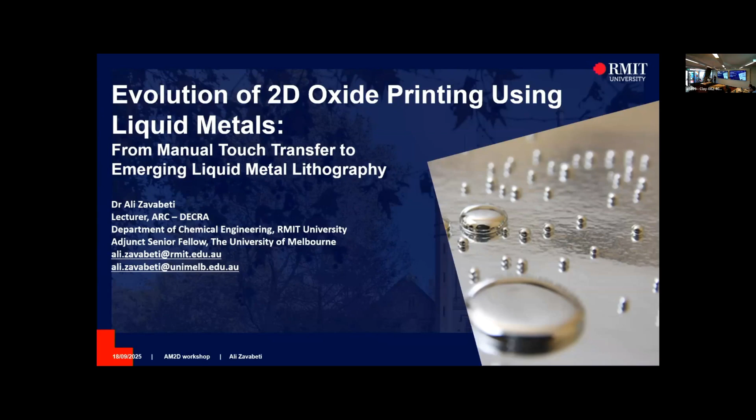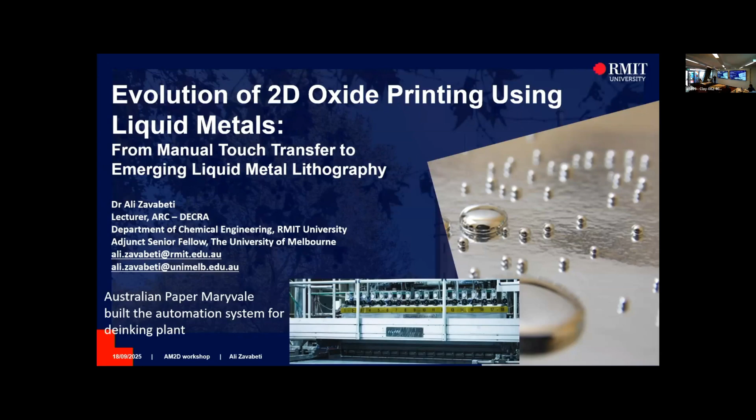Just a disclaimer, this is a recently developed technology, less than 10 years old, so some of it is adopted technology and some of it is ongoing research. As Naima introduced me, my name is Ali Zavabeti. I got my PhD looking at liquid metals and their surfaces, and we successfully exfoliated 2D oxides from liquid metal surfaces. The relevance, as Naima mentioned, is that I also used to spend time at Australian Paper down in Maryvale, building the automation system for a de-inking plant. So that's the relevance from my work to larger scale printing, and I try to bring these two together.

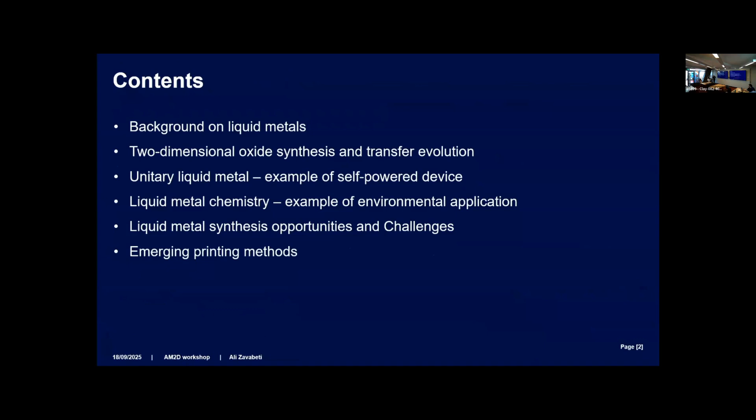So I'll discuss liquid metals briefly. I'm sure many of you know what liquid metals are. I'll talk about unitary metals, just one metal, liquid metal chemistry, which is also very interesting to investigate, some of the opportunities and challenges, and some recent work we did in printing 2D layers.

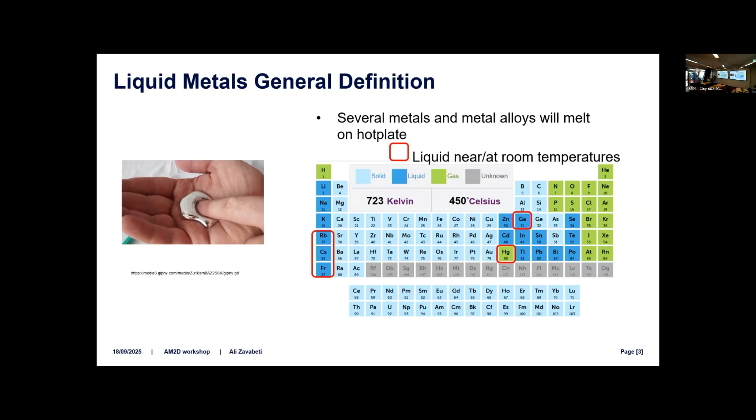Of course there's mercury, but mercury is toxic and also evaporates at higher temperatures. Rubidium, cesium, and francium are pyrophoric or radioactive, so they're not really useful. So we end up using gallium and its alloys, which are non-toxic and melt at around 29.7, 29.8 degrees, so if you hold it in your hand, it melts.

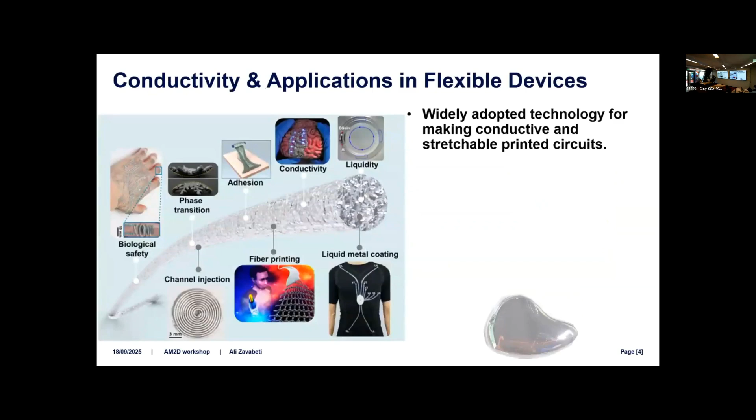Liquid metals are mostly integrated because of their conductivity in flexible device applications, basically stretchable devices. That's the main thing that stands out from other coatings, that it stretches and goes back to normal because it's liquid, it just merges back.

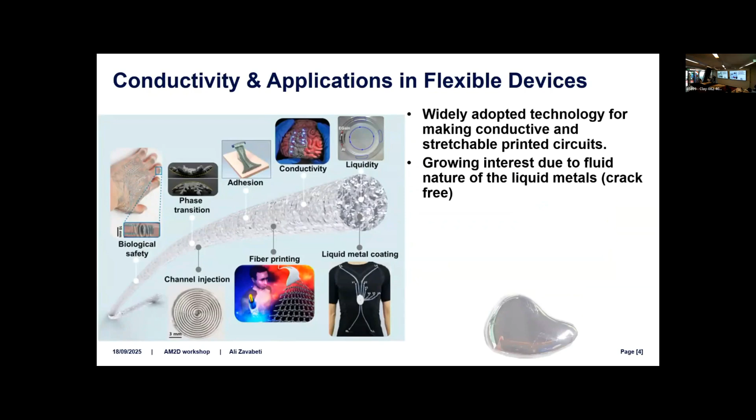So the two most investigated or utilized alloys are called EGaIn and galinstan. EGaIn is gallium indium, with a melting point of about 15.5 degrees, and galinstan has a sub-zero freezing point, so both stay liquid at room temperature. These are highly utilized in these types of applications.

Basically, the bulk liquid metal, generally speaking, is mostly a passive compound. It can be used as an active compound, but mostly it's passive. So, for instance, let me try to play this.

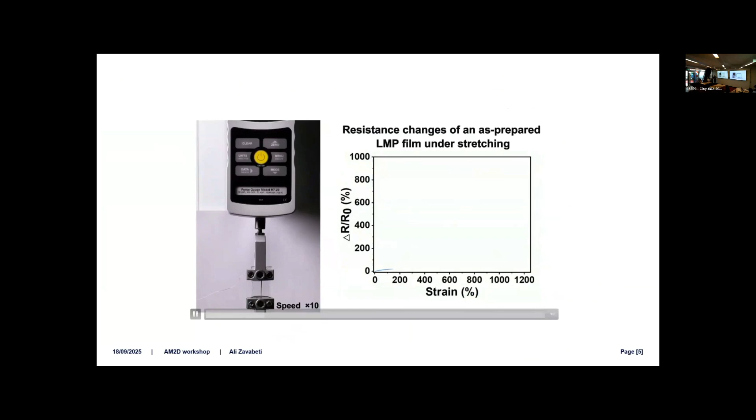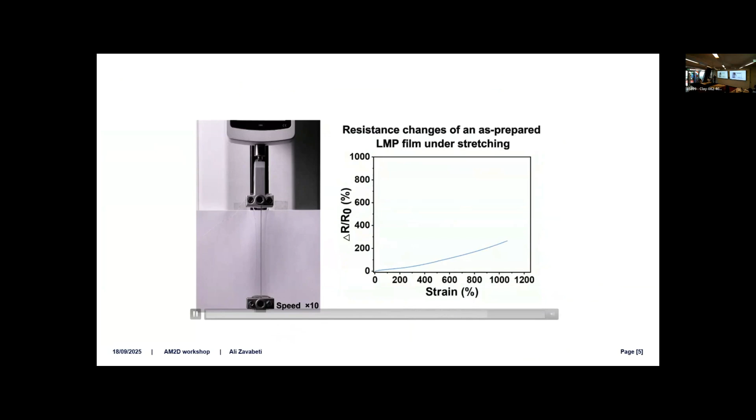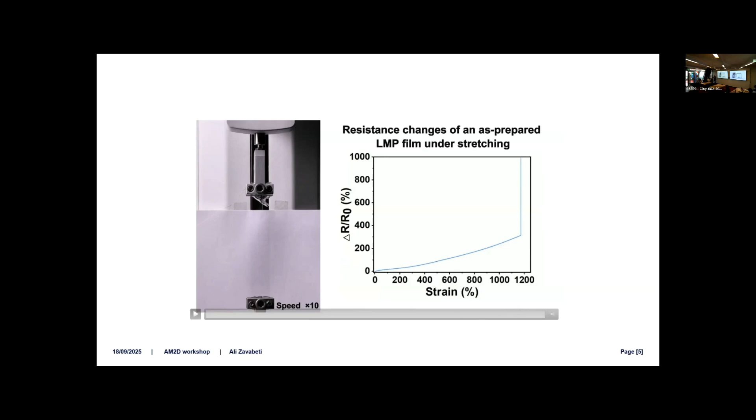It can be implemented in stretchable devices. They can stretch, and the stretchability is basically limited by the PDMS or the holding substrate, so it can literally go up to 1,000% strain. That can be used as a pressure sensor, for example, because as you stretch it, the resistivity increases, so you can measure the pressure and the stretch. Also, because they're biocompatible, they've been used as pressure sensors and as electrodes in bio devices.

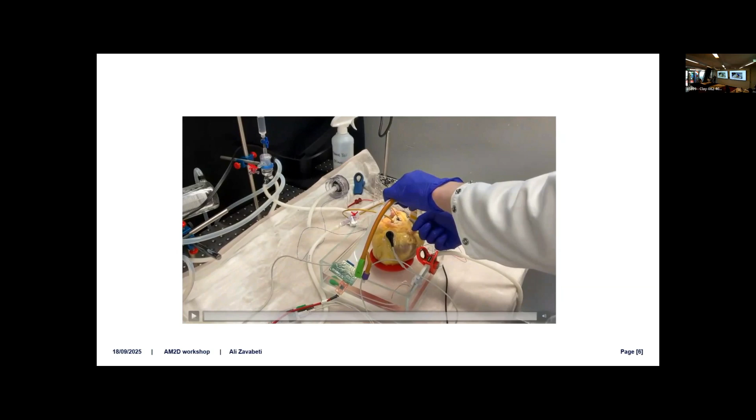So what I'm trying to focus on today is the printed layer of oxides from the surface of liquid metal. That's my main focus, which are the most active compounds we can use, basically functional materials that we can harvest for use in electronics, sensing, and so on.

On liquid metals, similar to all other metals, there's a nano layer of oxide spontaneously formed if it's in air, at room temperature, in ambient conditions. That oxide layer is self-limiting; it grows and creates a barrier, both a physical barrier and a potential across it that limits growth of the oxide layer, so it remains in the nanometer regime.

Again, one fascinating thing about liquid metal is that a liquid surface is the most atomically flat substrate, so it's really ideal for 2D material growth.

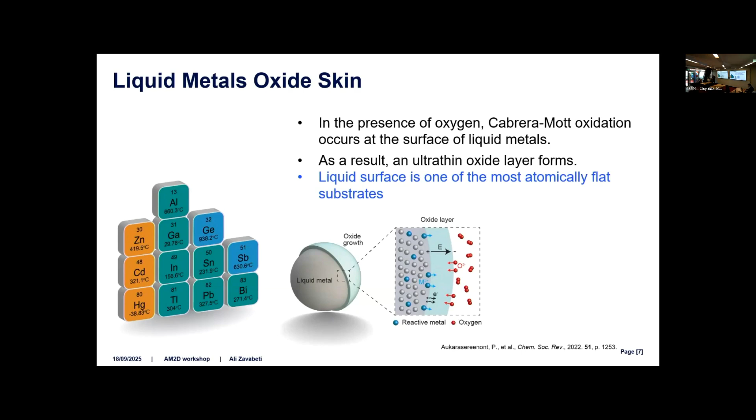So we have invented several methods for printing these 2D oxides. We started in 2017, 2016 by just touch printing, basically melt the liquid metal on a substrate, get a substrate, another substrate, touch the surface and delaminate. So we could harvest 2D layers.

Then we came up with a slightly larger surface area printing. We called it squeeze printing. So we can place a smaller droplet between two substrates, press them. As the droplet expands, it forms oxide, and also at the same time, the oxide attaches to the substrate. So we can coat and print 2D oxides on this substrate.

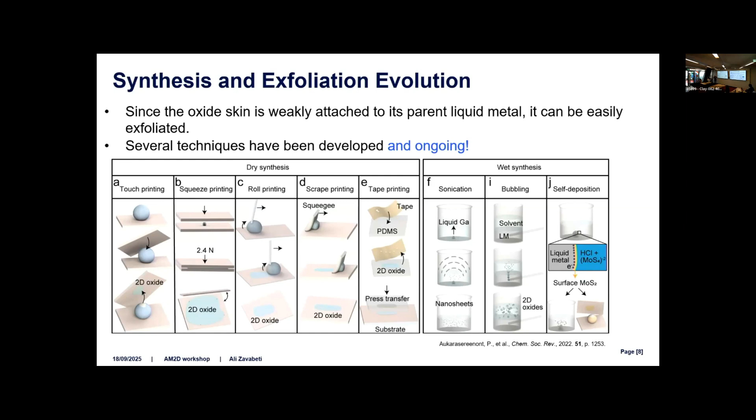And also we invented roll printing. Basically, it's like a pen style. You can roll a droplet and you can basically write in two dimension. Again, we invented several different methods to also have them as a suspension as well. So I'll just play you a video of how we have done this.

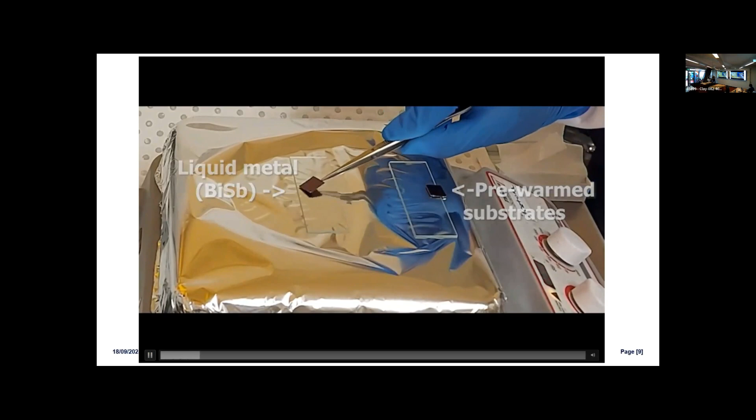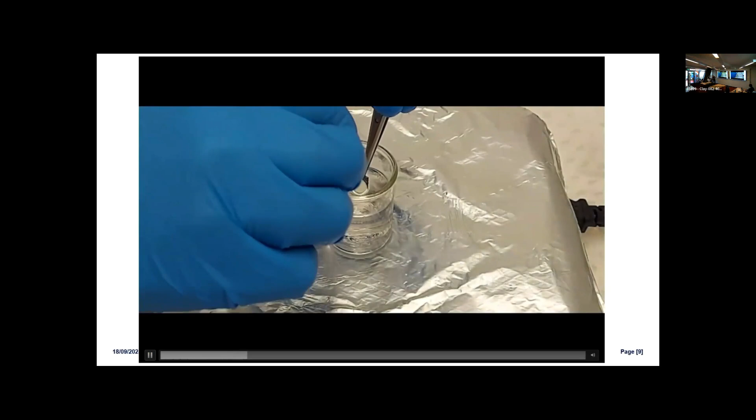Firstly, touch printing. So you can grab a substrate and touch to a liquid metal, and then you've got a 2D material printed, as simple as that. Or you can basically squeeze, and then you get a larger area. But because you delaminate also liquid metal, you can wipe it in warm ethanol, so it can be easily cleaned.

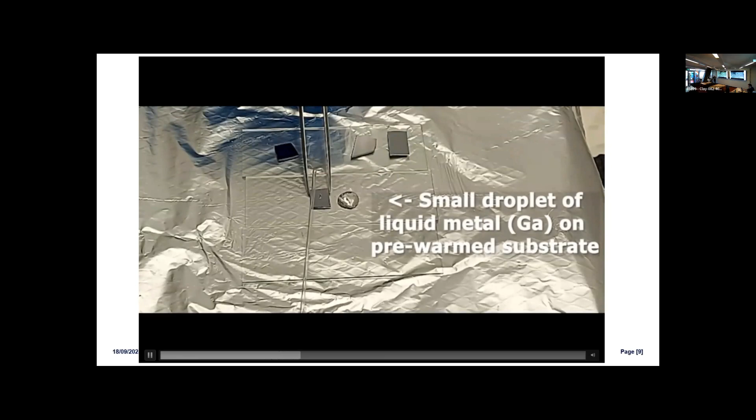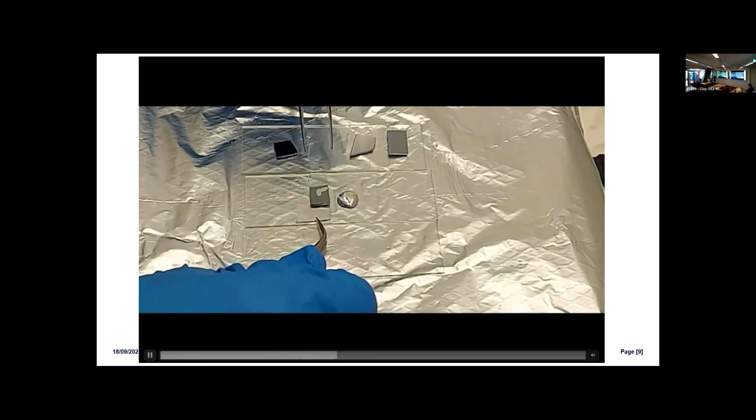The roll printing we invented for this specific mixture because the viscosity for this specifically was very high, and we had to drag it along the substrate.

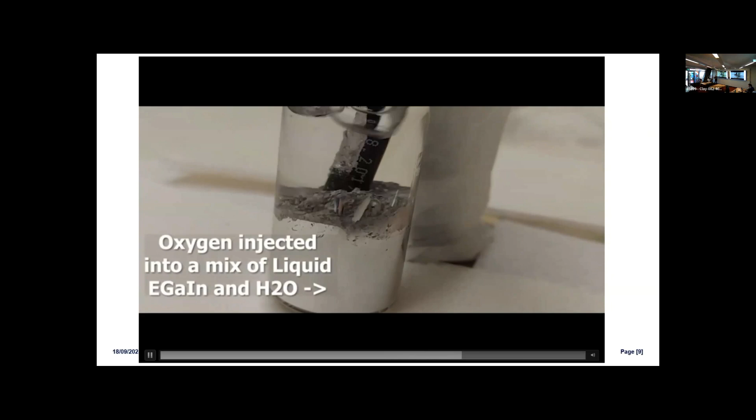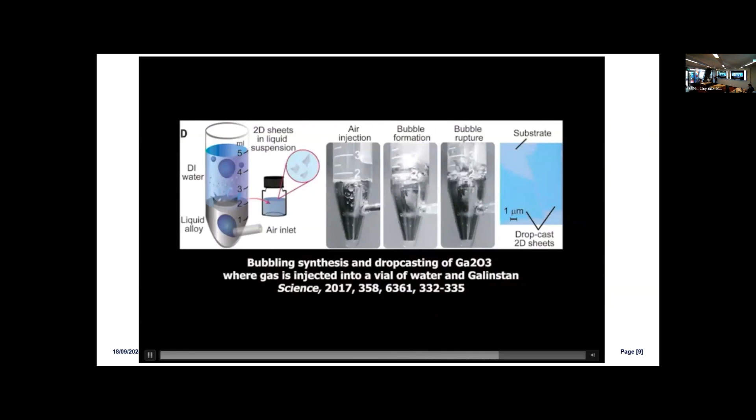And also, to get in a suspension, we can just bubble gas, any reactive gas. Here, just oxygen containing gas, and then you can basically as the bubble rises, it forms a 2D oxides and then releases 2D oxides. Then you can basically drop cast.

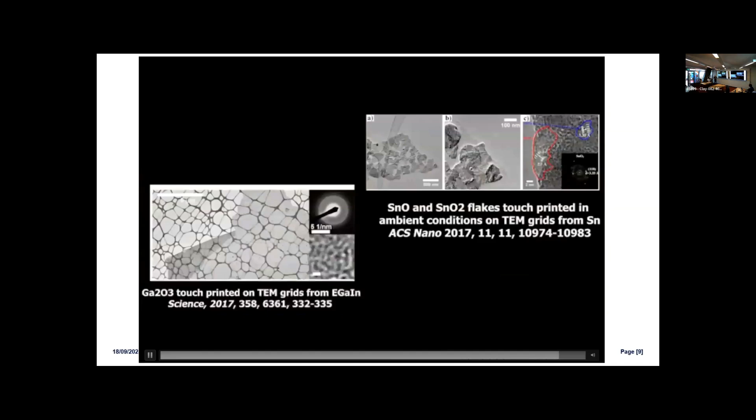So here is the way that we can also clean the surface. If you squeeze, the alloy comes out from the other side. It's fresh. The surface is fresh, so you can again grab another substrate. Here a TEM grid, because we need to also study these 2D layers atomically. Basically, we use TEM to study, so that's the way we transfer onto a substrate.

Oh, I think I jumped out. Okay, so when we

So we can also change the surrounding gas to other gases. For instance, here is H2S. And then we can melt tin and touch a surface. We can get one of the best piezoelectric materials as a coating, which is SnS.

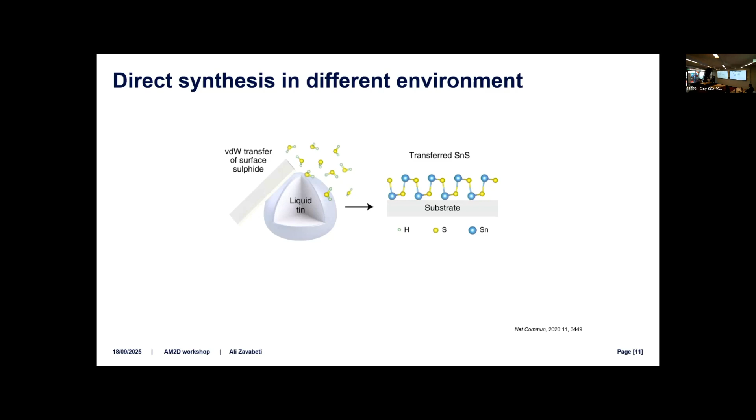All right, so would like to just briefly discuss about single metal against alloys. So what happens if you have alloys and if you have single?

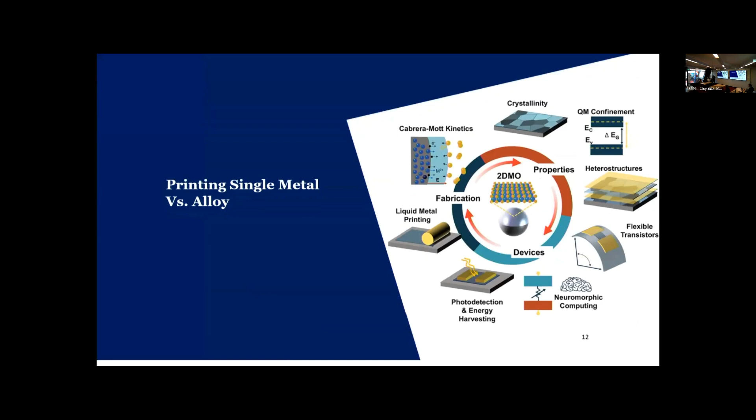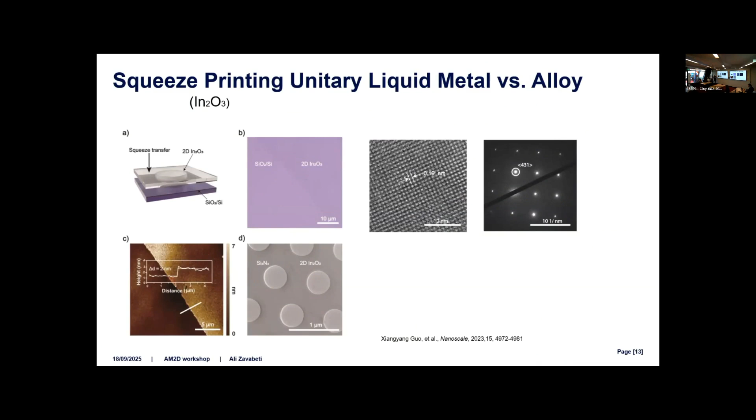So for single metals, for instance, we have indium. We can squeeze print and we get highly crystalline. It's a cubic indium oxide. It's about 2 nanometer. Basically, the indium can melt at just above 150. So we place a hot plate around 200, just above 150, and we can basically 2D print these very nice indium oxide layers.

For ITO, basically ITO is widely used contact material. Basically, it's a TCO, transparent conductive oxide. So we have shown that if you mix indium and tin, and then we squeeze print, we can get ITO as thin as just a few nanometers. So here is 1.5 nanometer. We can multiple print or just a single print, and we can basically, we show it is conductive.

And we use touch screen in our publication, and this is being used with a different style. So in industry, they used to, like in Apple and Samsung, apparently they used to have a glass inverted and float onto liquid indium and then sputter tin on top to make ITO. However, they have changed their process slightly to also just, instead of doing sputtering, just to melt it together with indium. So they adopt, this is an adopted technology at the moment.

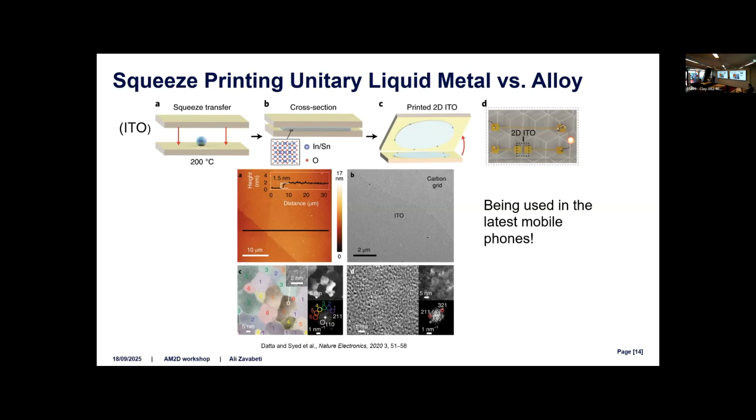So, and then there is also a chemistry involved with liquid metal. It's not just mixing two metals and get a complete mixture.

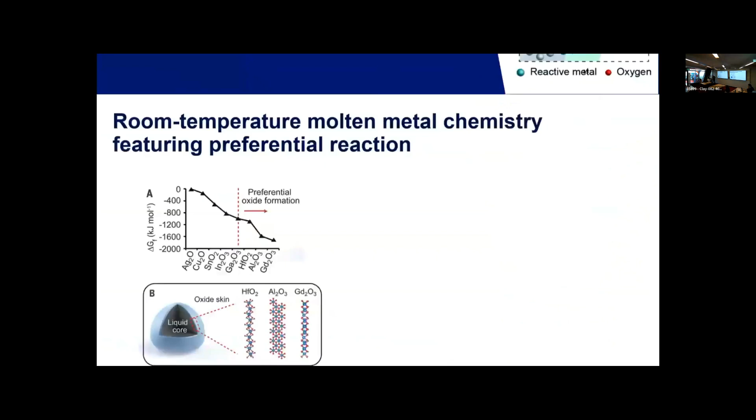What we found out is that gallium can dissolve many metals. We can basically very easily grind other powders into gallium, and therefore harvest the oxide layer. So we tried that with hafnium, aluminum, and gadolinium powders, and we could achieve the surface mostly dominated by these oxides.

This is a different chemistry, and the way we harvest it is a touch printing method, not squeeze printing. The reason is we need to allow enough diffusion for large atoms like gadolinium and hafnium to diffuse to the surface and react with oxygen.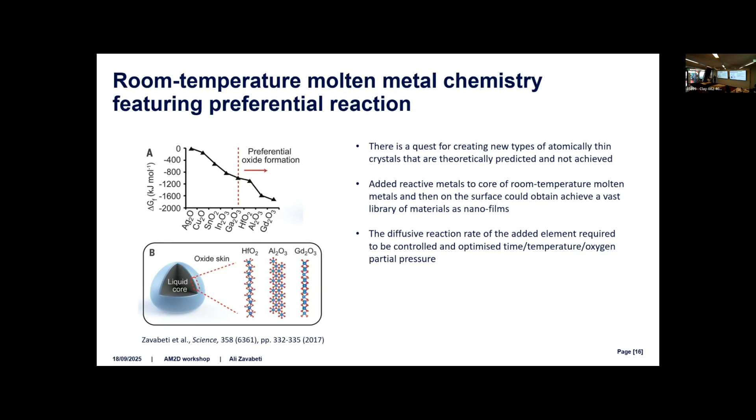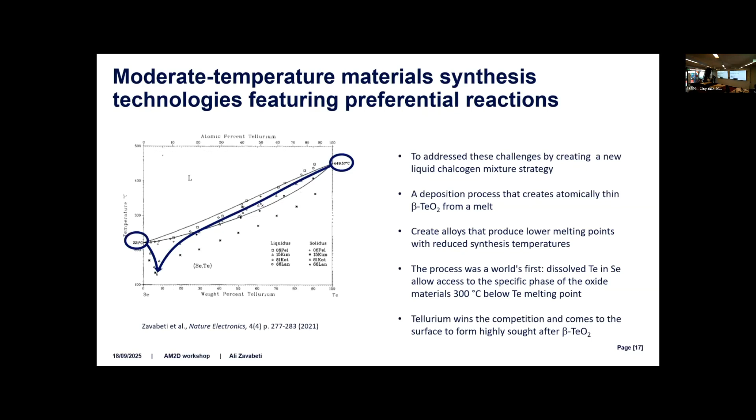So we use the same concept. We mixed in tellurium and selenium, and by doing that we lowered the melting point. Tellurium melts at 450, and some phases of tellurium oxide are not achievable within that temperature. So we reduced the melting point and printed tellurium oxide in beta phase, which is a high p-type mobility oxide. We made devices out of it—they are a wide bandgap, high mobility p-type coating. This is a SiO2 substrate, and this is a printed, large area printed 2D beta tellurium oxide.

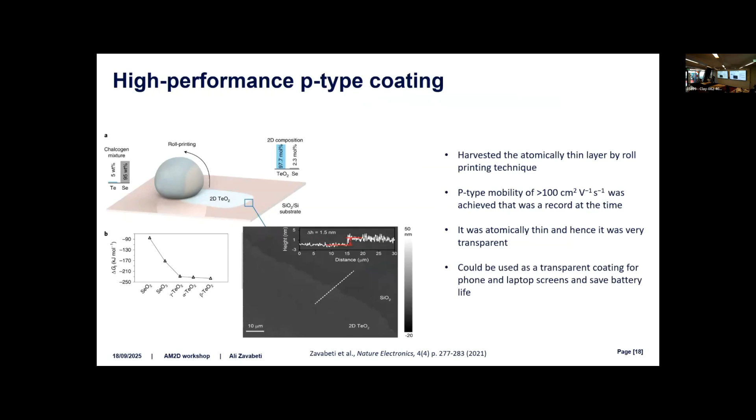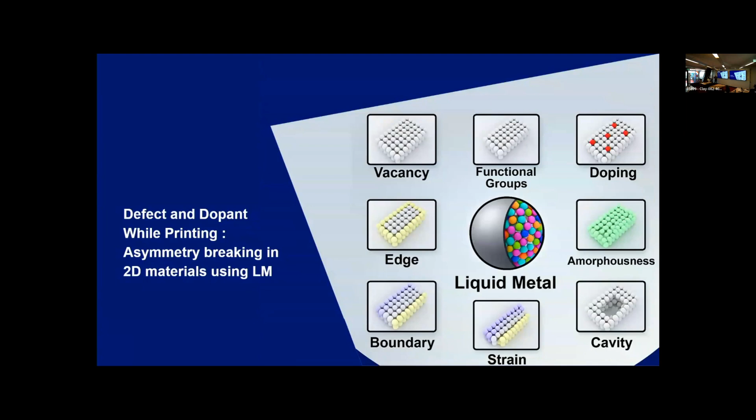Next is just the unique opportunities in liquid metal printing in engineering the skin, basically. We can also engineer the vacancy and doping and so on.

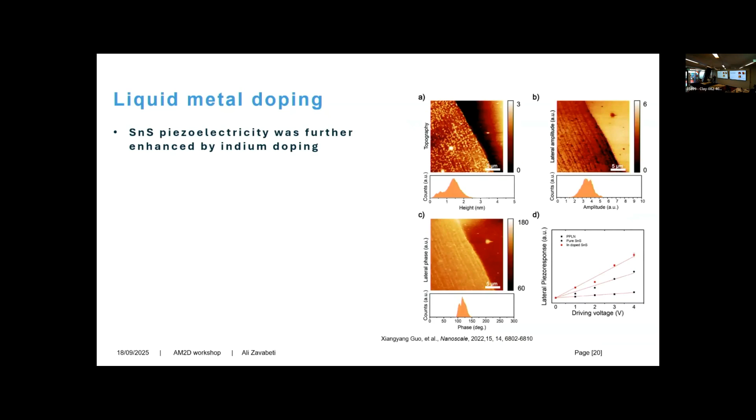So what one of my students did was with SnS, the material I introduced earlier, which is one of our materials of choice for piezoelectric material. He substitutionally doped indium inside SnS, so we could improve about 22.6% of the piezo coefficient, as well as make gas sensors that could detect NOx, NO2 in less than 2 seconds, which is really impressive.

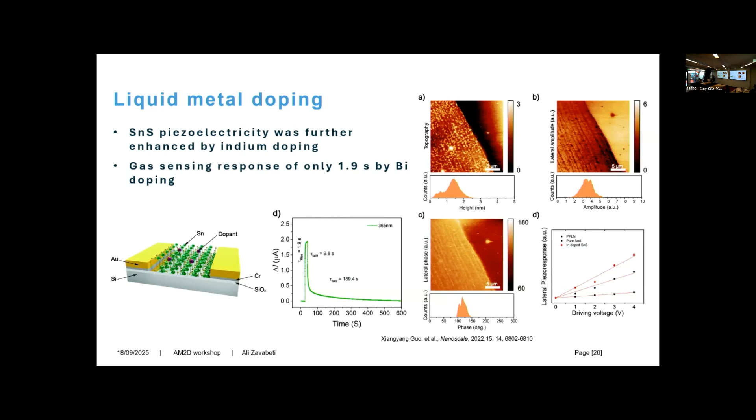I'm showing this because I'd like to mention that this type of doping is generally not done in situ. Usually it's done as a post-treatment by irradiation, but this is basically an in situ growth. We mix them as an alloy, and then we print them as a single unit, single layer. So they are not post-treatment—they are in situ growth using liquid metal methods.

As I mentioned during the introduction of liquid metal chemistry, the ratio of added element in the base liquid is different from what ends up in the 2D film, because of differences in Gibbs free energy of formation, or the combustion energy. So we sometimes add a very high ratio of less reactive material to get just a little bit of doping in the oxide layer.

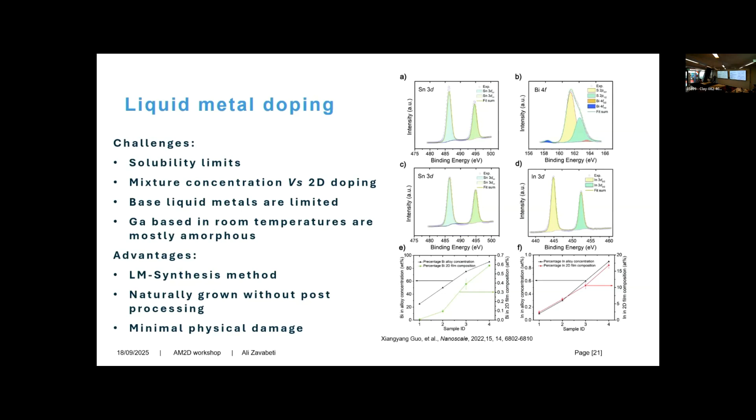The challenges we do have are solubility limits—we can't really add a lot of material into gallium, so there's a solubility limit. Base liquid metals that we can melt on a hot plate are limited to maybe 5 or 6. But the advantage is that these are naturally grown layers without post-processing, and they're very easy to make. It just needs a hot plate and a human—you combine these two and you can basically have a printed 2D sheet.

Another opportunity is the doping. We can change the doping of these layers. We've shown that if we just add certain elements, there is a competition for them to come to the surface and appear in the oxide. We can show that for gallium, we can print N-type gallium, and then also by adding some elements, we can make a P-type oxide, gallium oxide, which is again great.

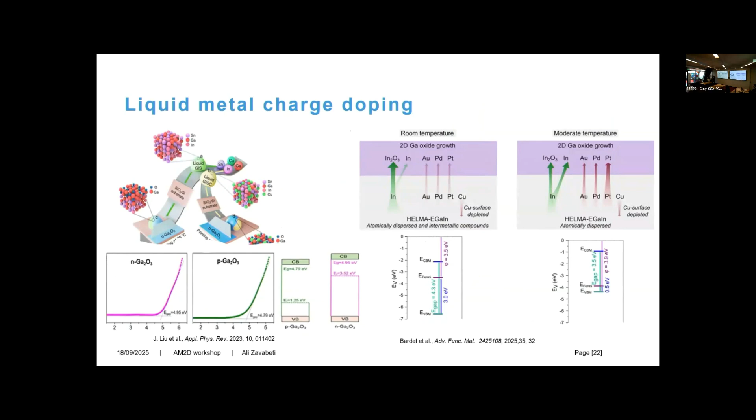So for defect engineering, what my students have shown in the lab is also for printing 2D bismuth oxides. If you reduce the oxygen content to ppm levels, about 10 to 80 ppm oxygen, and print in less than a second, you can induce—you can break the centrosymmetry of the crystal structure.

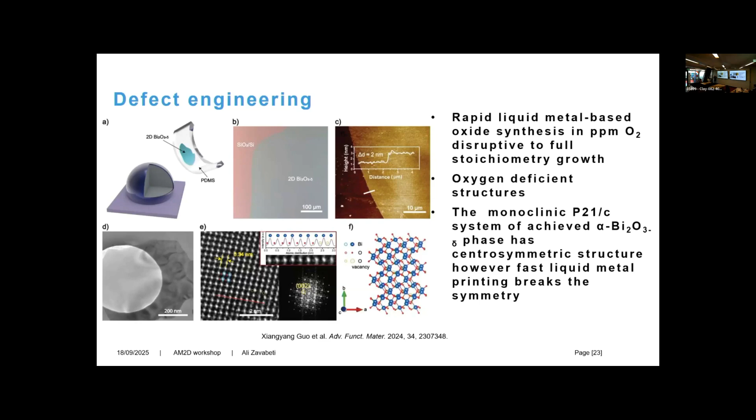Bismuth oxide, this specific phase, is a centrosymmetric crystal that doesn't have the functionality—for example, it doesn't have piezo or memory performance. But we could print at low oxygen ppm, as well as very fast printing, to disrupt the full growth of the oxide layer. So we basically broke the symmetry and made a non-centrosymmetric oxide layer.

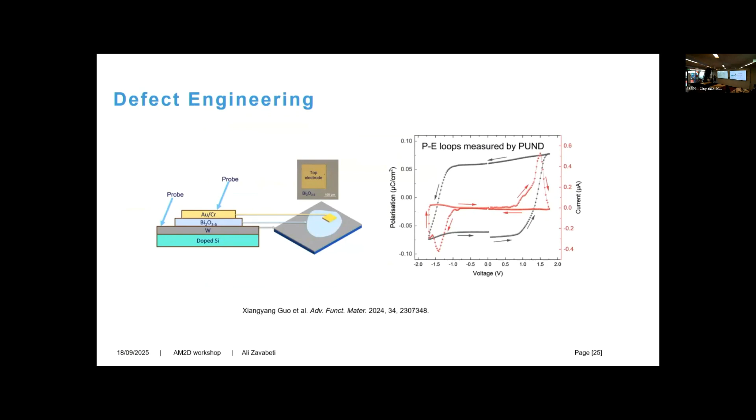We've shown that we can actually make self-powered devices out of it that are piezoelectric. We also used a positive up, negative down measurement to show PE loops, so they are basically ferroelectric materials from a material that intrinsically doesn't have that capability—which is really excellent to have.

So again, liquid metal is offering a unique chemistry, a unique method of tuning the surface, engineering the structure, and so on. So this is a printed layer of bismuth oxide on SiO2.

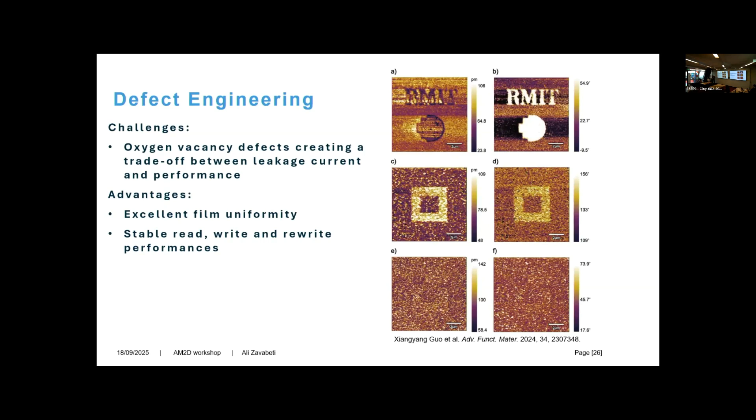We can program these printed layers as a memory device. Just using AFM-based methods, we can write the RMIT logo, delete it, write a square, delete it again, and read it a month later. That square is still there, so basically it keeps the memory. So we could make functional devices.

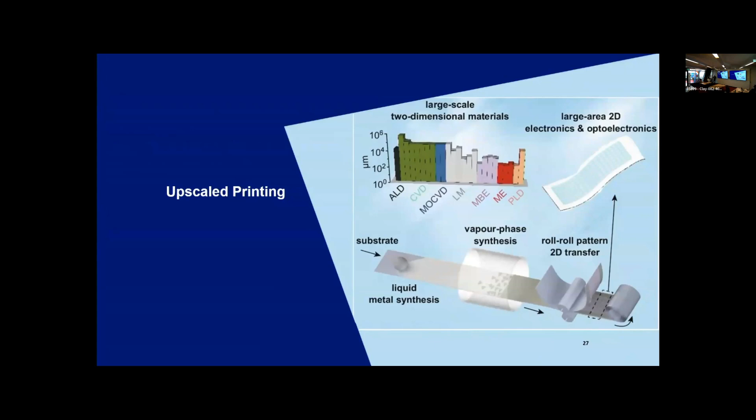As I mentioned, these technologies are very new. We invented this in maybe 2016, 17, so the TRLs are low. However, there is ongoing work to upscale these processes.

This is from groups in the US who upscale these methods. One, they published in Science—this is one of the liquid metal leaders, Michael Dickey in the US. They printed meter scale oxides. And one group in the US, also our collaborator, is printing using a roller system.

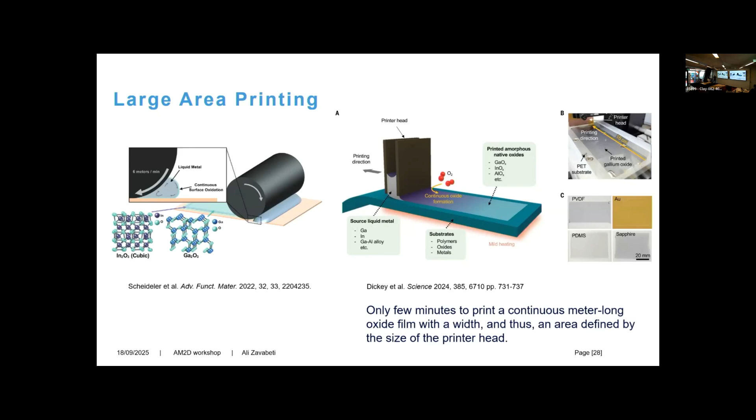And just the recent work we did at Monash—we tried to print using Naima's printer. This is actually done by Naima.

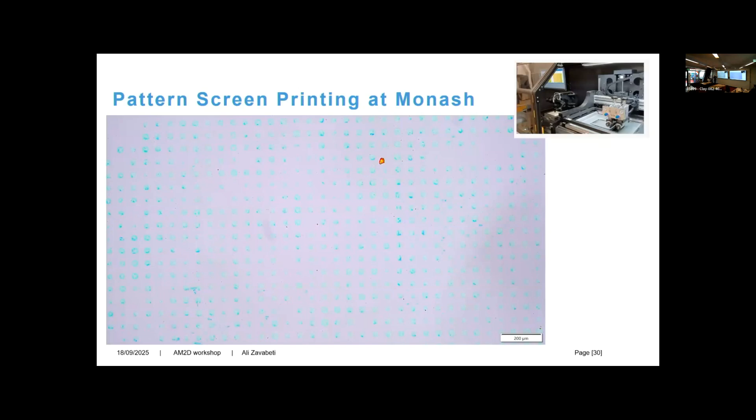At the moment, there is no liquid metal lithography technology. There is nothing that I know of, at least. So this is the first lithography using liquid metals printed at Monash, which is really great.

We can basically print shapes, done through a mesh. What Naima did was put a mask above SiO2 and then pushed liquid metal through it using a squeegee. We could get these very nice arrays that we have not done before using liquid metal technology. We don't have any direct lithography methods—we can still do lithography using photolithography or electron lithography, but using direct printing, we haven't done it yet, so this is the first time.

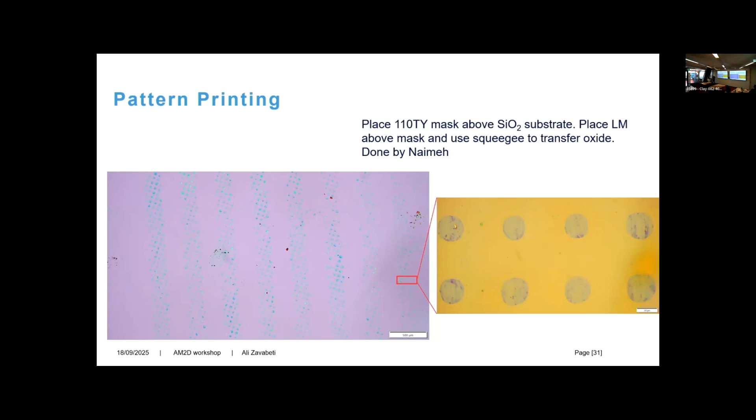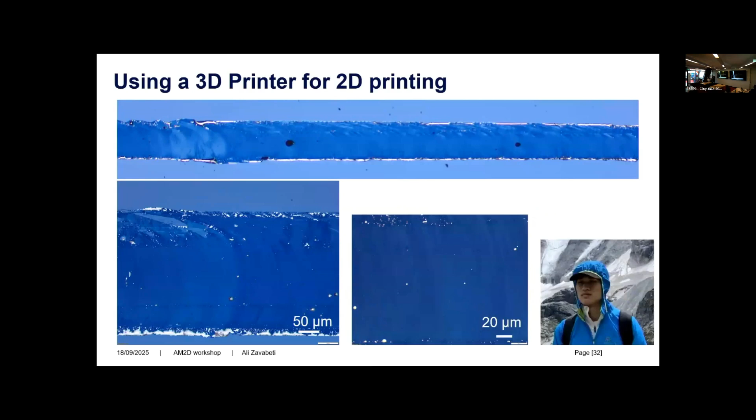I would also like to show you, at the end of my presentation, my student who is also printing these 2D layers. He's using a 3D printer to print in 2D. That stretch is basically just a 2D oxide. He just used a small pipette tip with liquid metal inside, and the 3D printer moves and leaves a 2D layer behind, which is really great.

What happens is he goes forward, and there is a liquid metal residue because of the high surface tension of liquid metal—it just goes back to join the nozzle.

So liquid metal printing basically offers a wide library of two-dimensional materials as well as bulk printing. Especially for 2D printing, these functional layers are uniform, atomically thin, ranging from maybe half a nanometer to maybe 7 nanometers based on the parent metal. They allow in situ defect engineering, doping, and also P-type, N-type charge doping. These methods are very fast, very simple, and vacuum free. And of course, it is work in progress as well.

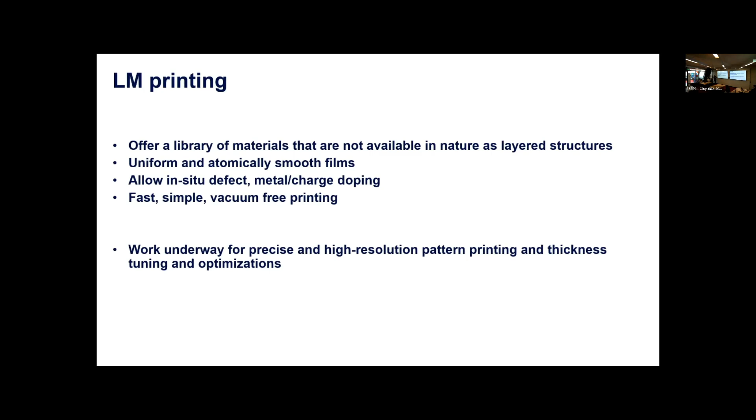I would also like to thank my collaborators and my mentors, and thank you for your time.

Thank you, Ali, for a very nice talk, like always, and thank you for passing the printer to me. Thank you for coming here and letting us do a trial with these liquid metals. It was actually a sample of unsuccessful screen printing that we could benefit from for designing the array, but we hope we can continue together. So it's time for questions, first from the audience.

Is it on? Yep, is it on? Yep, perfect. First of all, fantastic presentation.

Thank you. I just wanted to ask, because I work with liquid metals as well, have you noticed what's the crystal quality difference between pure growth and liquid metal growth? Because from my understanding, liquid metals aren't as high quality as something like MOCVD.

Good question. So mostly, if it's done at low temperature, it's mostly amorphous—sometimes no crystal at all, just amorphous. Depending on the application, they can also be more useful than highly crystalline material. But we have shown we can make them crystallize by annealing. However, direct printing, like room temperature printing, usually results in poor quality crystal, but it's a very nice uniform amorphous sheet, just low crystallinity.